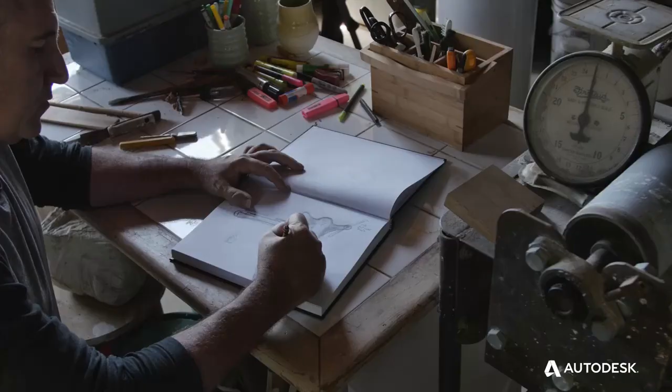As technology advances, the path from design concept to product creation is becoming more blurred. Advanced tools like Fusion 360 allow you to tackle ideation, digital design creation, and validation through simulation, as well as manufacturing, all in one place. Now you have the freedom to explore form and function digitally like never before.

Through this course, we'll explore the aspects of designing and creating a complex search and rescue drone, giving you a deeper look into the planning and design phase of a complex electromechanical device.

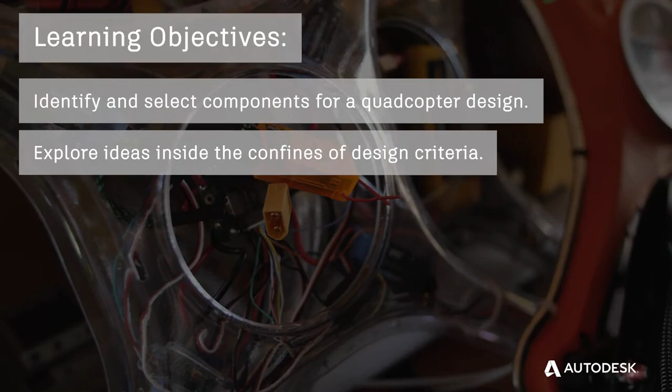After completing a series of lectures and exercises using Autodesk Fusion 360 software, you'll be able to identify and select components for a quadcopter design, explore ideas inside the confines of design criteria, create a complex design with advanced CAD tools, conceptualize a product, explore generative type shapes, and produce realistic rendered images and video. There's a lot to do, so let's get started.

In this course, we'll use Fusion 360, a cloud-based 3D CAD/CAM tool for product development that combines industrial, mechanical design, collaboration, and machining. Fusion 360 is available for both PC and Mac users, and it enables fast and easy exploration of design ideas with an integrated concept-to-manufacturing platform. Best of all, it's free for educators, students, and institutions.

To access and download the software, go to autodesk.com/fusion. Once there, select Student from the pull-down menu. From there, you'll be asked to create an Autodesk account or sign into an existing Autodesk account. Once you're logged in and registered, you can download and install Fusion 360 like any other software.

Fusion 360 User Interface. After completing this lesson, you'll be able to identify legacy, preview and updated user interface elements, and use the new Fusion 360 user interface. If you've been a Fusion user for a while, you may have noticed the changes in the user interface, from the legacy UI to the preview and now to the most current release. In this video, we're going to take a look at all of those and see how it changes the workflow.

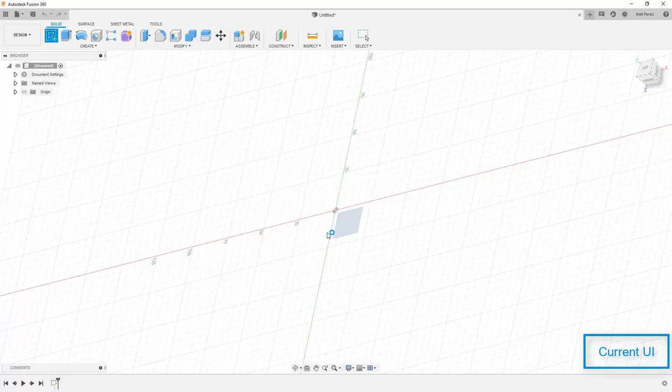You still create sketches the same, you still have the same access to your tools, but your sketch tools, for example, are going to be contextual. Your sketch palette looks a little bit different because all of the constraints have now been moved up to a toolbar, where before they were located in the sketch palette. So this shouldn't affect the actual modeling process, but only change the way you access your tools.

For example, if you're used to starting a sketch by activating a sketch tool first, you can still do that with shortcut keys or the marking menu. So notice that we still have our sketch tools. They're located under a Create drop-down, and we have a sketch location on the ribbon that's located inside of our design workspace. So again, same tools, just slightly different access.

Next, let's talk about some of the other workspaces. The Render workspace has received an update, but again, this is mostly in terms of the icons. Let's take a look now at the Animation workspace. And again, the functionality is the same, however the icons have slightly changed. And again, this is to keep them common across the board.

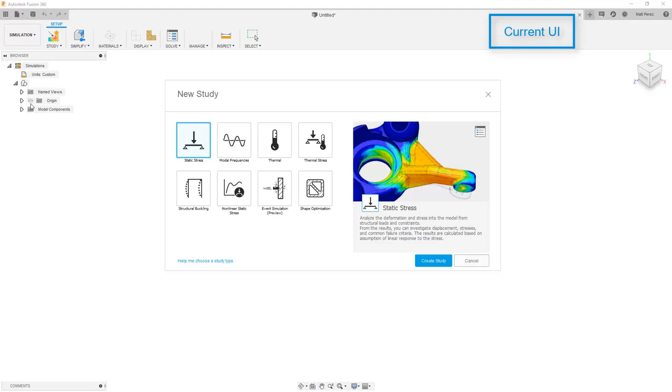Now, let's take a look at the Simulation workspace. This should look very familiar when starting a new simulation. You pick your study, and then you have access to your tools. In the legacy UI, again, all the tools are the same, however the icons have changed. So this again should not affect the way that you access things, with the exception of viewing the results.

In some versions of the user interface, we might have seen a tab on the ribbon that allowed us to access the results. However, in the new UI, we now have a results button that brings up all results tools, and when we're done looking at the results, we simply finish. Now let's take a look at the Manufacture workspace.

If you've been around Fusion long enough, this used to be called the CAM workspace. There have been some big updates that happened in this manufacture workspace over the past year. And also, the user interface does look different depending on if you're using manufacturing extensions or if you're simply using the manufacture workspace. It's always a good idea to check the preview functionality as well as the extensions that are available to see if any of these are needed for your workflow.

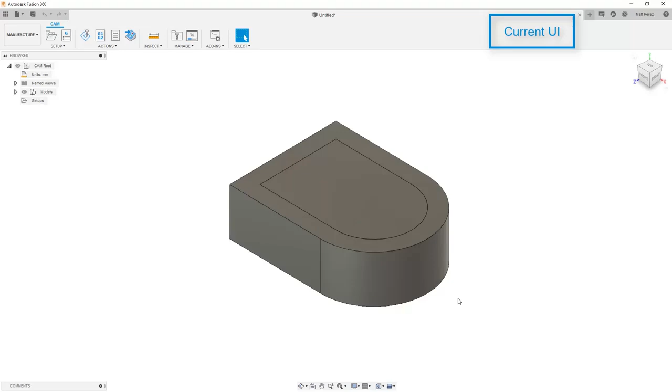Next, let's take a look at drawings. I'm not going to compare the new UI to the legacy UI in terms of drawings. Again, the functionality has stayed the same. However, the icons have been updated. You'll see here we still have access to the same drawing views and the annotation notes as we did before in the legacy UI.

Back in the modeling environment, I want to talk about one more thing that has changed, and that's changed between the preview user interface to the new user interface. We no longer have a light bulb icon in our browser next to things that we want to change the visibility of. We now have an eye icon, and when we select the eye icon, it'll be grayed out with a slash through it telling us that these objects are hidden. However, when we activate it, the slash will disappear and the transparency or opacity of this will also change.

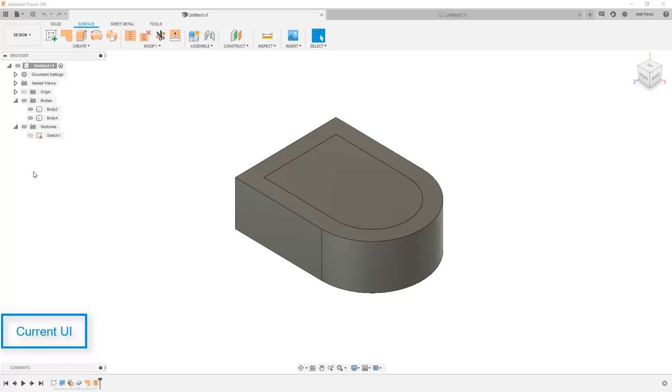So hopefully that's been helpful in allowing you to see the legacy user interface as well as the preview and the most current release user interface.

In this lecture, we cover all aspects of drone UAV design, from planning, component selection, fabrication, and flying. Unmanned aerial vehicles or UAVs can be piloted by somebody on the ground or pre-programmed to follow a route or perform a specific task. A UAV can come in all shapes and sizes. In this lecture, we specifically focus on multi-rotors.

Multi-rotors are categorized by the number of propellers. The drone design focused on in the course is a quadcopter, or UAV with 4 propellers. A UAV can have any number and orientation. We focus on quad, hex, and octocopters and their applications.

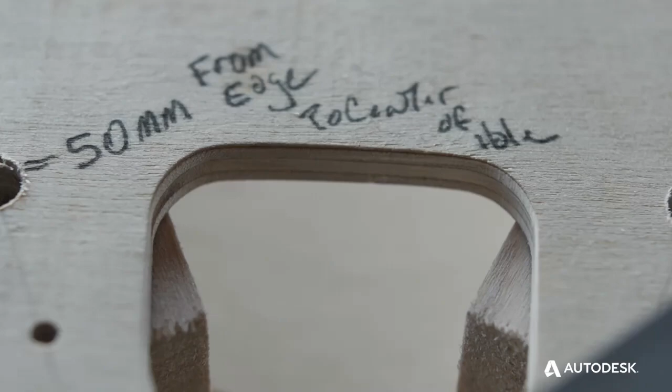Quadcopters range in size from nano, that can be the size of your finger, to units that are several feet across. Their intended application dictates the size to a certain extent. Smaller drones are used for indoor hobby flight, while larger ones have specific functions. Somewhere in the middle, there are a large range of sizes that are used for various reasons, from FPV or first-person view quadcopter racing drones to GPS camera tracking drones and the newly popular backpack drones. Quads are probably the most popular style out there, and you've likely seen or flown one of these already.

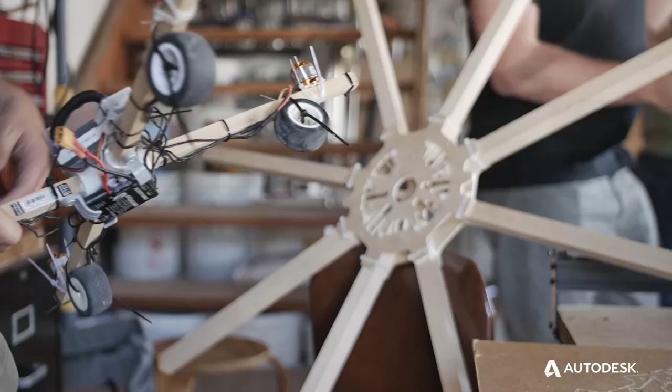Going a step further, with hex and octocopters, you add the ability to carry more weight and have a bit of redundancy in case of a motor failure. If a motor fails on a quadcopter, gravity wins. On a hex or an octocopter, you can still fly and land safely in most cases, protecting whatever precious cargo is being transported. This could be a burrito or life-saving medical supplies.

By far the biggest application, other than just hobby flying, is in aerial photography. This could be a selfie drone or a rescue drone like the one we're creating. Camera drones are being used for 3D mapping, construction, search and rescue, action sports, agriculture, military, security, and even real estate. Basically any reason you would need an eye in the sky. Cameras can be anything from an octocopter carrying a DSLR camera to a quadcopter carrying a thermal imaging camera.

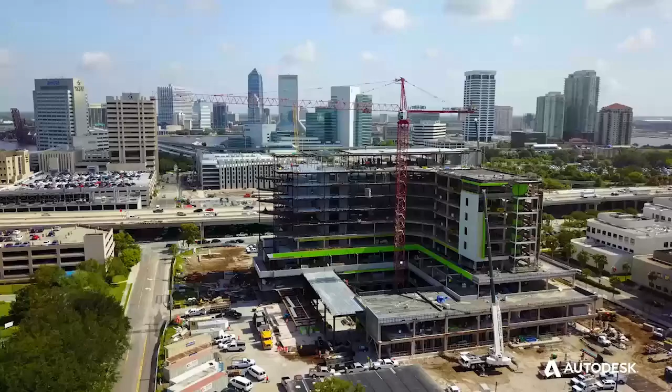Design and construction teams are quickly discovering the value that drone mapping brings to all stages of a construction project, including initial site survey and design, volume and elevation measurements, comparisons, and quality assurance. In a fraction of the time it takes to conduct a ground-based survey, a drone can automatically fly and capture imagery of a project site that can then be processed into highly accurate point clouds compatible with building information modeling or BIM software.

Industrial designer and visual artist Eli D'Elia has taken drone design to the extreme level with Game of Drones. The drone sports company is creating a worldwide platform for beginners and experts alike to compete in drone competitions and sports leagues through groundbreaking drone hardware, software, and the toughest drone airframe. Eli is on the forefront of drone design, developing the next generation of UAVs for aerial combat to industrial and agriculture use, and even search and rescue training operations.

Oftentimes, technology is driven by innovative students at colleges and universities, and design projects or challenges can be a breeding ground for innovation. This innovation environment is exactly where the inspiration for our course came from.

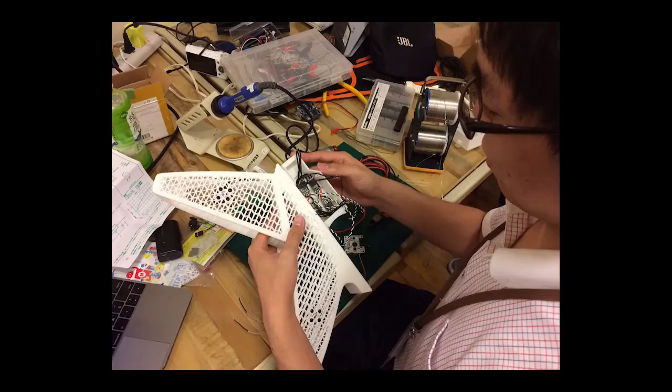Japanese duo Yuki Akasawara and Ryo Komedo, aka Team ROK, and their innovative X-Fane design was born out of tragedy. In the wake of natural disasters in Japan, Yuki set out to create a style of post-disaster search drone. His innovative approach to design inspired us to see where we could take it next.

In addition to Yuki and his design project, universities around the world are paying close attention to drones and utilizing them throughout their curriculum. One such university is Virginia Tech. Virginia Tech has invested in an outdoor drone cage that allows students and faculty to explore the next generation of drones without worrying about the confines of FAA safety regulations. This drone playground is 300 feet by 120 feet and 80 feet tall.

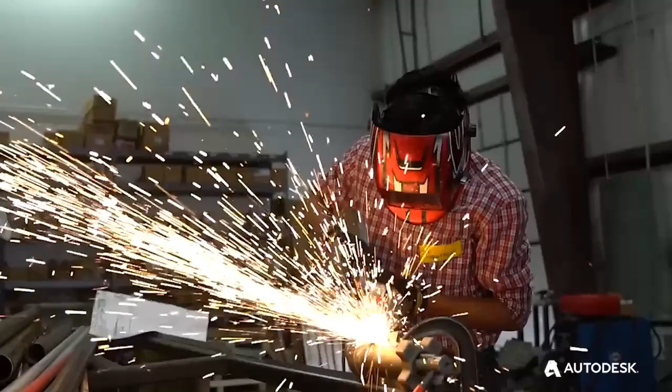This means things like swarms of drones working together can be realized without the risks associated with testing these drones in the open world. There's almost an endless line of stories of innovative students realizing new and unique ways to utilize this technology. And the great news is that it's literally at the fingertips of everyone.

The last thing that we need to mention before we start designing has to do with legality. If you plan on actually building and flying your own drone, it's important to check with your local regulations. Best bet is to check your local regulations and the FAA website.

In this design criteria lesson, we'll be talking about our design specifications. After completing this lesson, you'll be able to understand design requirements, apply critical thinking, and make informed design decisions. A design criteria is an explicit set of goals that a project must achieve in order to be successful. If you're designing a quadcopter like we are, or if you're designing any other product, you're going to have a list of criteria that you need to match.

Now for our case, we're going to be creating a post-disaster search RPA, or remote piloted aircraft. Now this is the most important thing that we need to fit into. We need to have a vehicle that can go up into the air and view areas that are hard for us to get to. The next thing that we need to fit is ease of transport.

That's going to be very important to us when we're creating something that can get into these locations where potentially there's a natural disaster, but it's hard for a human to get into these areas to search for people. So the ease of transport is going to be important because you're not going to want to hike to remote locations or get into these hard to access areas while carrying a large case with you. And lastly, we want to make sure that we have a long flight time. We're going to do everything that we can to optimize our design to increase that flight time.

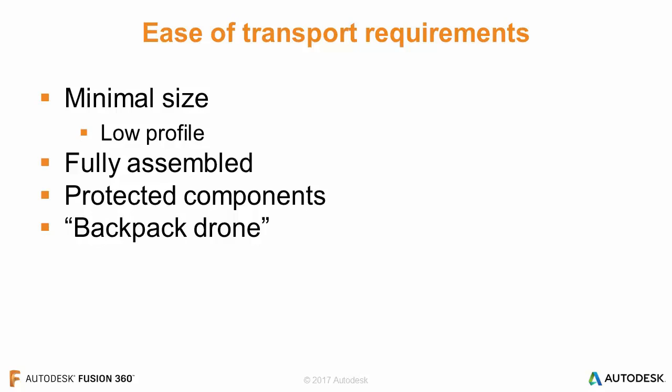And lastly, I have backpack drone. Now this is sort of a category that's popular now because there are plenty of drones on the market that can fold up and fit into a backpack. So we're going to minimize the size, keep it as low as possible, so that we can get it into roughly the size of a backpack.

Next we want to talk about the long flight time requirements. We're going to start out planning for a minimum of 15 minutes of flight time, and we're going to explore various options to see how we can increase that flight time. It's going to be important that not only it's easy to get to our location and it's quick to get up in the air, but that we can stay up in the air and search for as long as possible.

The next thing that we want in terms of our flight time is a good thrust ratio. Now a thrust ratio is the available thrust in relation to the mass of the vehicle. So for example, if we plan everything out so that we have a maximum of 2,000 gram force of thrust on a 1,000 gram vehicle, we have a 2-to-1 thrust ratio. For fast racing drones or acrobatic drones, you're typically going to see an 8-to-1 or a 10-to-1 ratio. Now we're not going to be going that extreme, but we want to make sure that we have at least a 2.5-to-1 thrust ratio, if not better.

The higher that ratio, the quicker it can maneuver, but generally you're going to be drawing more current and you're going to reduce your flight time. So we're going to have to explore our options, and there's going to be some give and take to plan out our maximum flight time while still keeping it agile enough to get to our areas quickly and maneuver into tight spots.

We also want the ability to configure. Now what I mean by configure is be able to change out batteries and not just add new charged batteries, but maybe add a 4-cell battery instead of a 3-cell to increase the voltage. Maybe add longer batteries so that we have a larger amperage capacity. So there are various options that we can explore to configure the batteries and change the flight time.

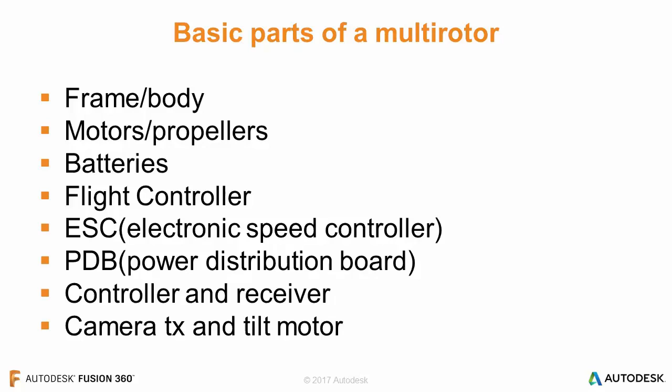So now the last thing I want to talk about in this lesson is the big picture. And understanding the big picture helps us understand what these components do and how it helps us plan them out. So the overall weight of any flying vehicle is extremely important. You can't make a very heavy flying vehicle and have it fly for a long time and be maneuverable, all the different things that we need in our design criteria. So as we look at the overall weight, the batteries that I've planned to talk about in this course are between 100 and 300 grams each. Now we'll get into picking the components later, but right now all you need to know is that we're going to be using 2 batteries, so we're looking at generally 200 to 600 grams total weight on our vehicle.

The components that we're using, which includes the motors, the props, the speed controllers, the power distribution board, the flight controller, the receiver, all the other stuff that's not the batteries, that's going to be between 200 and 300 grams. The reason I gave a range there is because we can mix and match parts, we can change things out and have a big effect on that weight. Now we're going to be shooting for the 300 gram range, but there's a range because you can use different cameras. You can remove the tilt servo and have a fixed camera. We can maybe change out our power distribution board. Different things like this can have an effect. And lastly, we have the body, which is to be determined.

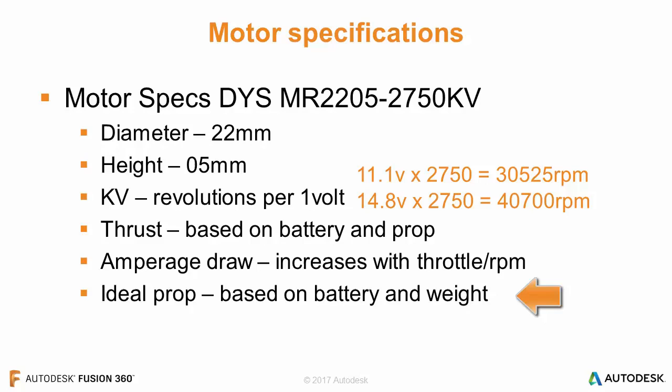And lastly, when we talk about motors, we're going to talk about an ideal prop setup. Now again, it's going to be based on battery, it's going to be based on the weight and the amount of thrust we need, and we'll get into the specifics of those.

So next we want to talk about battery specifications. The batteries that I picked out for this course, I have 3 different battery choices that we're going to look at. They're all Turnigy, they're all LiPo, and we want to explore what these numbers mean. Now the battery that we're talking about here is a Turnigy LiPo 3S 1500 mAh 20 to 30C.

Now the first thing that we want to understand is the LiPo part of it. This is a lithium polymer battery, and this has a very high discharge rate while being fairly light. And these are standard in quadcopters and flying devices, airplanes and helicopters and all these things. It's a common type of battery. Now it's one that we need to be very careful with when you're charging it and discharging it and so on. So it's important that we understand what these numbers mean.

So first let's talk about the 3S number. Now the 3S stands for 3 cells. Each cell is going to be roughly 3.7 volts. So when we talk about a 3S battery, that's an 11.1 volt battery. When we talk about a 4S battery, that's going to give us 14.8.

Now when we were just talking about the motors, remember that 11.1 volts or 14.8 volts will change the max RPM of the motor. Now at 11.1 we were roughly 30,500 RPM, but we went up to about 41,000 RPM when we went to a 4S or a 14.8 volt setup.

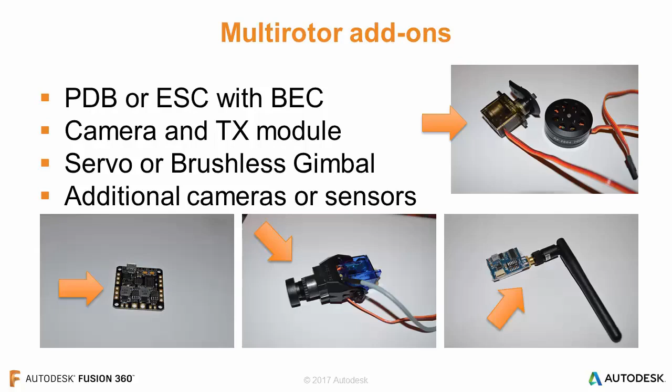In this design criteria lesson, we're going to carry on with part 3 of our component selection. After completing this lesson, you'll be able to apply calculations to select components and make informed design decisions. In this lesson, we're going to be focusing on the amount of thrust provided by our motor and how our battery choices are going to affect both the lift as well as the flight time.

So the DYS motor that we're talking about here is the MR2205-2750 kV. We already know that the 22 is the diameter of the stator, the 05 is the height of the stator, and the 2750 or constant velocity is multiplied by the voltage to give us the max RPM unloaded. But what does all this mean? Well, DYS provides these thrust charts with their motors so we can reference the motor, how our battery choices are going to affect things like the thrust, as well as which propellers that we want to choose.

The first thing that we need to consider is the mass. Now, I've picked out a couple different batteries that we're going to talk about. The smallest 3-cell battery that we're going to talk about gives us roughly a total mass of 800 grams. The largest 4-cell that we're going to talk about gives us a total mass of roughly 1130 grams. So at this stage, we're not too concerned with the amperage or the amount of current that the battery can push out. We're solely going to focus on the 3-cell and 4-cell differences and how they apply to the thrust.

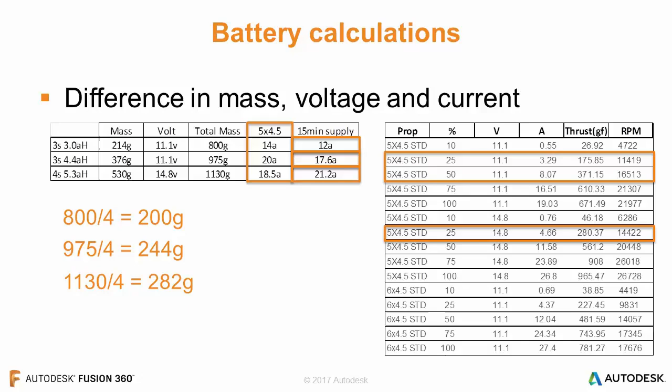Even though the course is laid out so we use all the same components that we're talking about, it's perfectly acceptable for you to take a look at these and figure out better components to use, whether it's a different motor, whether you're planning for a different battery system, or simply sourcing different components so that they're lighter or easier to manufacture or put into our design. I will give out a full parts list, and with this course I've also supplied an Excel spreadsheet that has all of this information on it as well. So you can take a look at that, the components that we're using, and how that correlates to what we're doing here in this course.

For this design criteria lesson, we're going to carry on with part 4 of our component selection. After completing this lesson, you'll be able to compare video components and options and make informed design decisions. First, let's talk about the camera system parts that are spec'd out for this series. For the camera, we're using a Fat Shark 700 TVL CMOS camera. It's capable of NTSC and PAL. For video transmission from the quadcopter down to the ground, we're using a SkyZone TS5823. For the monitor and receiver, we have a 7-inch 1024 by 600 monitor that's made by FieldView.

So first, let's talk about the camera. So the Fat Shark 700 TVL CMOS camera, this is a good system because it has a few things going for it. The CMOS type camera is lightweight, it has low power consumption, and because of the technology is fairly inexpensive. The specific unit has a few extra things going for it. It has removable lenses so we can change the field of view, and it also comes with a pan and tilt servo already built into it. Now in our case, we only need tilt, so I've deconstructed it a bit. I've taken off the pan servo and we've modified it slightly so that the servo is going to be held directly with our 3D print.

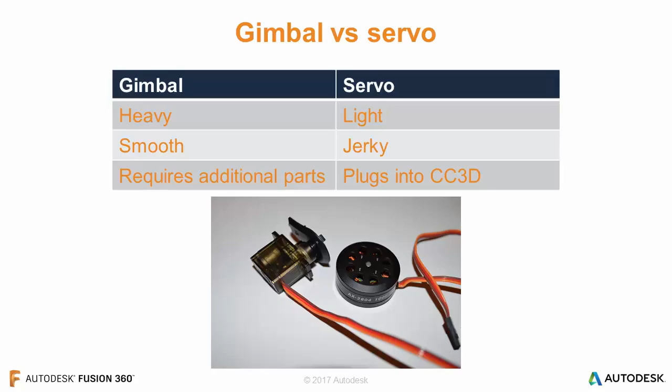In this design criteria lesson, we're going to talk about component location. After completing this lesson, you'll be able to understand multi-rotor mass location and make informed design decisions. First, we need to talk about the mass of each component. Now currently we have 4 motors, each of which is 28 grams.

There will also be some mass associated with the propellers, but this is negligible, and since it's spinning, there's a little bit more advanced dynamics that we need to talk about. But for right now, let's just use 28 grams per motor, and we have 4 of them. The flight controller, which needs to be centered on the quadcopter for the best performance, is 7 grams. Now I chose the Micro CC3D because it's fairly small size and has all the functionality we currently need.

If we tend to upgrade the flight controller, that mass could go up, but it's always going to be centered, so it doesn't really affect the overall performance by shifting mass around. The batteries are going to be a large portion of the mass. We generally want to shoot for between 50 and 66% of the overall mass. Now this includes the body, all the components, and that's where we want the mass of the batteries to fall.

Because we talked about several different ones, from smaller capacity 3 cells to a larger capacity 4 cell battery, we have a range here of about 100 to 265 grams each. We're going to be looking at and planning our overall design for the larger batteries, but we can also use the smaller ones as well. So we're looking at 2 batteries at 265 grams each.

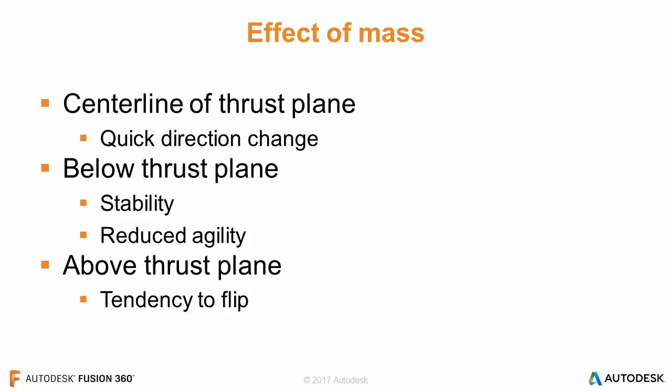Now if you're buying an off-the-shelf chassis, they're fairly configurable. There's lots of slots and holes where you can zip tie or affix different components, so you can play around and move mass around and see how things behave. So let's talk about the mass location with some screenshots of the final design.

So what we have here are the location of the battery, which is roughly centered on the thrust plane. Now you'll notice that the batteries are just a little bit below the thrust plane, and that's because we have components above them. We have the power distribution board, the camera and the transmit module, as well as the ESC servos. We also have the motors.

In this orientation, we have the motors flipped and the propellers below them. Now, in most cases, you'll have the motors pointing up and the propellers above. Now, the reason that we're doing this is for airflow and protection, but we'll talk about that in just a second. So the batteries together are about 530 grams.

So this is by far the heaviest group of components. So having it just slightly below the thrust plane allows us to offset the rest of the mass. Now we could move these up or down, but in this instance we have them kicked up just a little bit so that we have more protection during a crash or when landing.

The motors, in this case, we only see 2 of them. But if we look through it, because we have 2 on each side, we're talking about roughly 56 grams. We have 4 ESCs, or electronic speed controllers. Now in this case, we have 40 grams on each side.

Now if you'll notice, everything is working off of symmetry. We're trying to keep everything as balanced as possible, both left to right, fore and aft, and up and down. Now the ESCs' locations are on the top side of the chassis right now, but they actually can be affixed to the top or the bottom, depending on how we want to move the mass around.

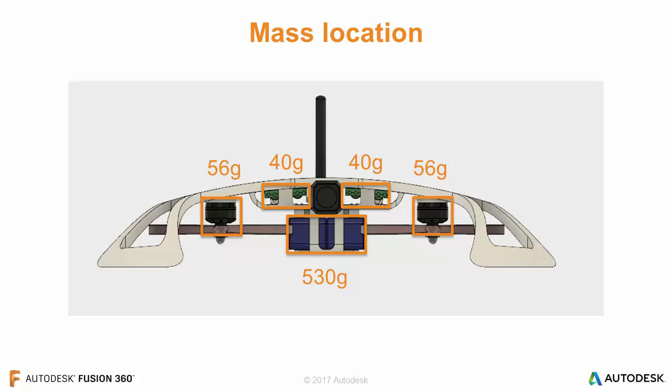So the camera is below the top and it's well above the bottom, so we're not really worried about any collisions or obstructions. And we also have the extensions around the propellers to protect this if we were to bump into a wall or something. Now on the back side, we have the video transmit module. This is also fairly close to the location of the controller receiver. Now the controller receiver is placed a little bit closer to center, but again, these can move around.

Now right in the center, we have the CC3D, which is the flight controller, which is 7 grams. And again, it's best to place that at the center of rotation on the vehicle. So if you draw a cross from each of the motors, right in the center, that's exactly where you want to place the CC3D. It also is directional. It needs to know which direction is forward, and that way it can control the motors.

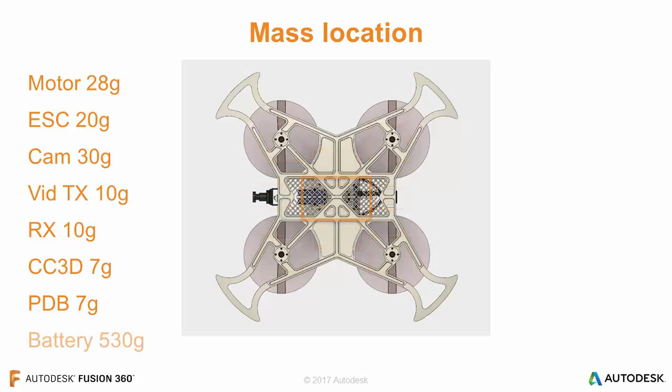Lastly, let's talk about the batteries. Now from this top view we can't see the batteries, but they're located center, and again they're located just below the thrust plane. Because they are the greatest mass, we want to make sure that they're located at the center, both when drawing a cross between all the motors, and that we get them close to the thrust plane so we have a very agile craft.

Now let's talk about airflow restriction, because this is also important. We're able to place the mass wherever we want, but we also have to be careful that we're not obstructing the airflow, because having any obstructions in the airflow will create weird oscillations and also will just affect the performance of the flight. It will reduce the flight time because the motors are having to work harder.

So you can see from this top view, the propellers are mostly unobstructed by the chassis. We made sure that no components were directly in the way. Everything is as close to center as possible. Now we could also make this overall size a bit smaller, but then we would start obstructing the flow of each of the propellers. Now the circles that you see around the propellers are just the path to make sure that we understand the full sweep.

And these are 5-inch by 4.5 pitch props. So this is the final size that we're going to go with, and we have a good idea of how everything was designed to make sure that we're not restricting that.

Another thing to consider just from a pure mechanical standpoint is the direction. So when we're talking about the direction, you'll notice that the motors are all spinning toward the center of the chassis. Now the direction again is important because we have to worry about obstructions. But in addition to the direction they're rotating, the proximity to other objects as well as the proximity to other propellers can greatly affect the performance as well as increase the noise that a quadcopter makes during flight.

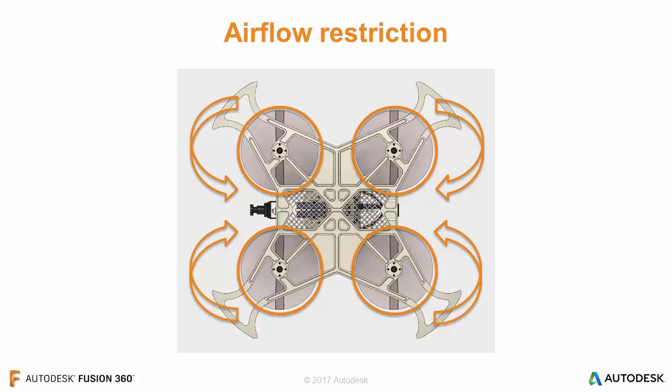These are all things that we need to take into consideration as we're designing our quadcopter. We want to reduce the number of obstructions around the propeller. We want to make sure that the chassis itself or the airframe is rigid. And we also want to make sure that we're not restricting the amount of thrust that we're applying. Now this is one reason for flipping the motors over and reversing them and trying to keep them away from the body as much as possible while allowing as much airflow to go through as possible as well.

In this lesson, we'll focus on creating battery keep-out sketches. After completing this lesson, you'll be able to create a sketch, create a constraint, and create a dimension. Welcome to the part in our course where we start to design our own quadcopter. Now, if you followed along this far, you've been given a lot of different information and you're probably ready to get started. But there's one more thing that we want to take care of first.

You want to make sure that you make a new project folder, and I like to make subfolders. So in this section, we're going to be talking mainly about the role of a designer, making the shape, the geometry, the overall product that we want. So I have a Coursera drone project folder and I have a designer subfolder. That's where I'm going to be placing my files. So now let's go ahead and get started with a new untitled document. So we're starting with a complete blank slate, and this gives us the freedom to do a few things.

The first thing that we have to think about is what our end product is going to be. Obviously we know that this is going to be a quadcopter or a camera drone, but ultimately when you're starting a new project you have to think about a few things. In Fusion you have a lot of flexibility. Now sometimes you want to create stuff that's just made out of bodies. There are no moving parts or multiple components, so you can just get started modeling.

In our case, we're actually going to be creating a quadcopter body. We're going to add a bunch of components like the motors, the batteries, and all the other components that are needed. So before I get started with my first sketch, I want to create a new component. So from my Assemble tab, I'm going to click this icon with the plus on it to create a new empty component.

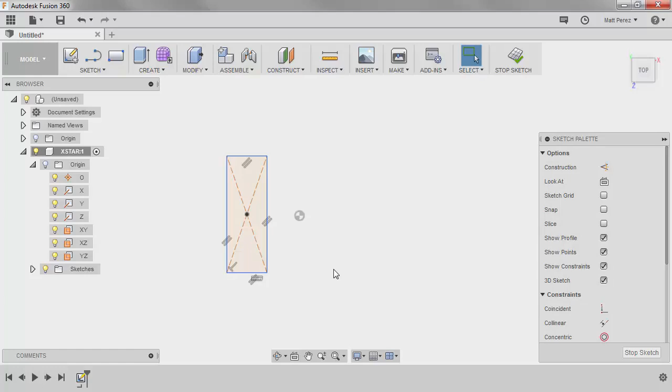Now you might be wondering why I did this, why I chose to just sketch it off to the left. Well, I'm going to take this right line and select it, Control select the origin, and then I want to place a midpoint constraint. So that's going to make sure that this line here is directly centered on my origin.

Now this is important because if you'll remember from our design criteria, we're going to be using 2 batteries no matter which size we choose, and we want to make sure that the mass of those batteries, which is 50 to 65% of the overall mass, is centered on the quadcopter. So by making sure that this line right here has a midpoint relation with the origin, we know that we can start basing our design off of that origin and make sure that everything is symmetric about it.

The next thing that we want to do is we want to place some dimensions. Now I'm going to hit D on the keyboard to place my dimensions, but again you can access that tool however you like. The first battery that we're going to be dealing with is going to be that 1500 milliamp 3S. So I'm going to place this width dimension of 33.5, and I'm going to place a height dimension of 75.

Now this is the smallest battery that we dealt with. So this one's going to give us a pretty good thrust ratio, but we're going to have about a 10-minute flight time with it. The other battery that we wanted to deal with, or some of the other batteries, went all the way up into the larger 4S range.

Now, during the calculations that we did, figuring out what a jump in batteries would do for us, we realized that the larger capacity 4S battery would give us better thrust while drawing less current and allowing us to get a longer flight time. So while this battery is great, and this is where we're starting at, not only because it's a very inexpensive battery, but also because it's smaller and easier to deal with, we also want to make sure that we plan for a larger battery.

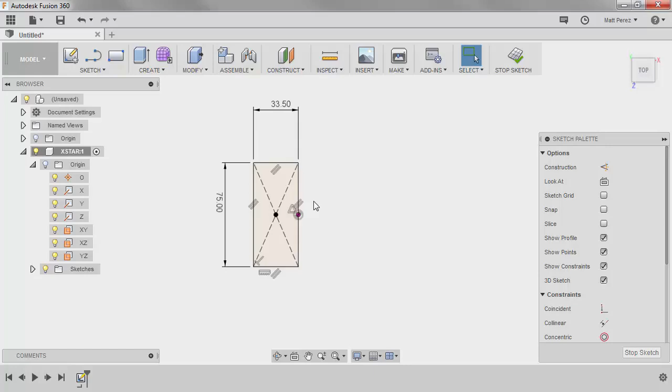So to get started, I'm going to draw an intermediate option, a 4-cell battery that has 2200 milliamp hours. It's a little bit smaller than the one that we talked about in the course, but it's small enough that we don't have to change the overall size of the design because it fits within the criteria that I'm looking for. Now you might be wondering how I know that. Well, I know that because I've already played with all the numbers and I understand the differences. This is a great exercise for you to do, to draw all the various batteries that you want to play with and figure out how they fit.

So I'm going to draw this one on the right side. Again, I'm going to make sure that I have a midpoint relation. So I'm going to select my line, Control select the origin, and place that midpoint relation. Then D on the keyboard. And for the 4-cell 2200 milliamp hour battery, it's actually 34 by 34 square, and its length is 105 millimeters. So you can see it's not that much bigger than the 3-cell that we're dealing with. It's a little bit longer to account for that extra cell inside of it. But in terms of the width, it's only 0.5 millimeter wider.

Now the great thing here too is that the extra thickness in this one actually comes from the height of the battery. It's 34 by 34, where the 1500 milliamp is actually not a square shape. It's 33.5, and then it's a little bit thinner in the other direction. But we're accounting for all these numbers, and this 4-cell 2200 milliamp hour battery is going to give us the thrust that we need. It's going to have a fairly good thrust ratio. It's not as heavy as the 2650 milliamp hour battery. And more importantly, it's going to fit within roughly the same size, so we don't have to make the overall device bigger.

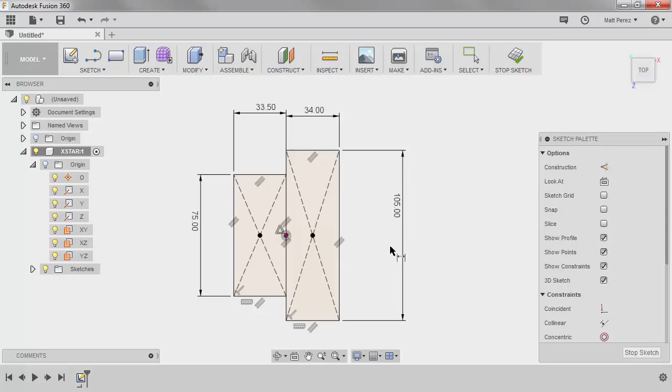So this is the main portion of our Keep Out sketch. So we're going to stop this. We're going to expand the Sketches folder, click on it twice, and we're going to call this Keep Out.

So now we have our Keep Out sketch. It's a good time to go ahead and save the file so we don't lose anything. And notice that my location is the Coursera drone project and inside of the subfolder Designer. So again, you can call this design whatever you want, and it's probably a good idea to spend a little time thinking about it. I'm going to call mine the X Star.

And I'm also going to make sure that I save it, make sure that it's in that location. So I'll expand my data panel, make sure that it's there. And now we're good to go and move on to adding some more sketches. In this lesson, we'll talk about how to start a complex part. After completing this lesson, you'll be able to create construction geometry.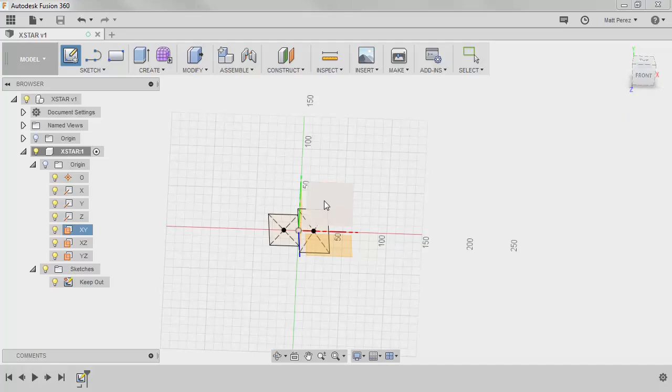So now that we have the battery Keep Out sketch, I'm going to rotate a little bit, and I want to create a sketch on the front plane. So again, I like to start my sketches by selecting the new sketch, and it gives me a good idea of the plane I'm dealing with. If you're ever curious about the plane, when you hover over it, you notice that it highlights it in the browser. So we're dealing with plane XY. And if you look at the view cube, you can see that we're also dealing with the front plane when we select XY. So that can sometimes help.

So for this front sketch, what I want to do is I want to create the shape of the new drone from the front. Now this is not the full solid shape because obviously it's going to be a very complicated part, but I'm going to create a reference surface that's going to give me the top shape. Now we're keeping this fairly simplified because we want to make sure that we explore a lot of creative geometry. We want to make sure that we learn a lot of the advanced tools as well as how to apply some of the basic tools.

So you don't necessarily have to 100% follow along with what I'm doing, but it's a good idea, especially if you're new to Fusion and you're new to designing, that you follow pretty closely along with what I'm doing so that you don't get too far away from the original core aspects that we're trying to learn.

So the first thing that I want to do is start a line. And again, you have many options for how you can get these tools. You can use the marking menu, you can go to the sketch option, and once you're on the sketch option here, you can go directly to the line tool, which is at the 6 o'clock position. So if you want to do this fast, you just hold down the right mouse button and drag straight down, and you're on the line tool.

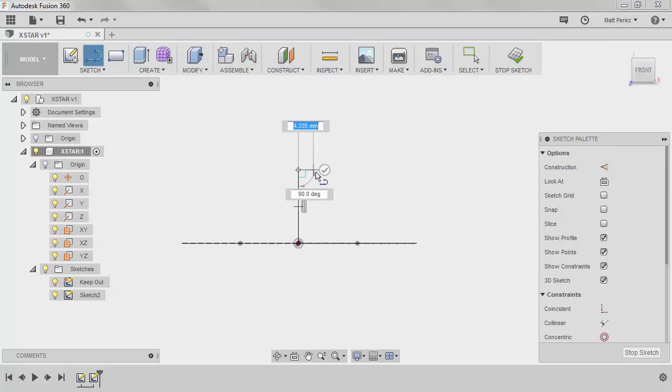You can also hit L on the keyboard to hit the line tool, or you can use it directly from the top toolbar. All right, so again, I like to access these with quick keys or various ways, so I'm going to use the marking menu to access my line tool, start at the origin, and I'm going to draw a line vertically. I'm going to click, and then I'm going to hit the green check mark. I want to hit escape to get off of that line tool, and I want to take a look at something. It automatically applied a vertical constraint for me, but the line is still free to float around.

There are two things that I need to do with this. First, I need to select the line by left clicking, and then I'm going to make this a construction line. It's only there for reference. The next thing I want to do is press D on the keyboard, and I want to dimension this line. And this one's going to be 76.2 millimeters, and I'm going to zoom out. Go ahead and draw one more line.

This one is going to be from the point at the top to the left, but I want to make a note here. So we made this a construction line after the fact. If you know that you're going to be sketching construction lines, you can turn the construction option on, and then everything you sketch will automatically be a construction line. Just remember to turn it back off when you want to create normal geometry.

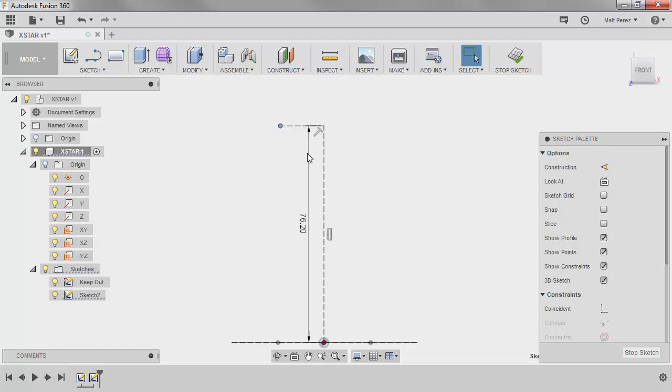This line does not need a dimension. It's only here for a tangency reference. But notice that it automatically applied a perpendicular constraint. So now we have perpendicular constraint, the points are coincident, and I have a vertical reference here. You might be wondering where 76.2 millimeters came from.

Well, if you remember from our design criteria, we wanted to keep the entire device as low profile as possible. Most of the camera drones on the market are relatively tall for additional flight stability, but we're looking for making an extremely agile craft, and we wanted to keep it as low as possible. So 76.2 millimeters is 3 inches, and 3 inches is sort of a criteria that I gave that I want to try to fit into.

Now, of course, we could make it taller or smaller as needed, but 3 inches will give us a pretty good margin of error in terms of keeping enough air above and below the props, so that way we don't have any restrictions or prop wash or any weird oscillations when we're trying to take off. So that's the starting point, and that's where that 76.2 came from.

Again, when you start these designs, sometimes you have to give yourself artificial criteria and see how things fit. And if we find out that 76.2 is too much or not enough, we can always come back to this sketch and adjust it, and everything else will be based off of that number. So as we look at this, 76.2, this is our starting point for the center line of our front shape.

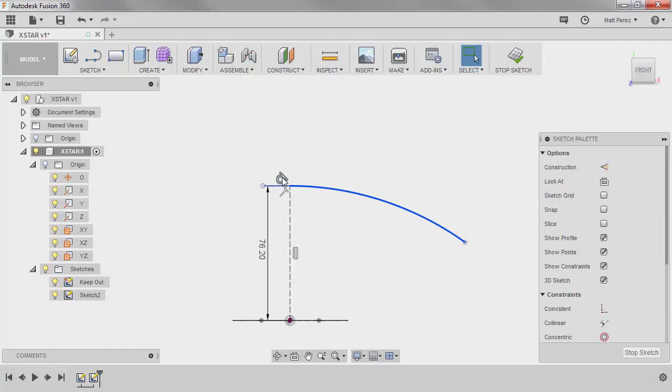So we're going to create an arc by going up to Sketch, and we're going to create a tangent arc. Now the reason we're going to create a tangent arc is because we're going to carry tangency from this horizontal line, and we're going to carry it out to the right. Now if you like to design out to the left, that's perfectly fine. I prefer to design out to the right. So I'm going to be starting from here and simply drag that out and then hit escape. Tangency is automatically applied because of the type of arc that we used.

And now there are two more dimensions that we need to apply to this. So D on the keyboard, we're going to go from this endpoint, from the origin, or from this vertical line. Either one is going to be fine. And we want to place a horizontal dimension of 200 millimeters. Then we want to give this a radius value of 500 millimeters. Now again, you might be wondering where these numbers actually came from. The 200 millimeters is because I want to fit within a certain constrained overall size.

Now remember, we're dealing with half of the shape here. So from the front, we have 200 millimeters wide, and it's going to be wider than our overall design. And the radius value is just approximately what looks okay. We want a little bit of curve because we're dealing with a 3D printed plastic part. If we print it flat, it's not going to be very strong. That little bit of curvature is going to give us some extra strength, some extra structure.

So the 500 doesn't really matter here. It could be more, it could be less. It really just gives us a little bit of rigidity to the overall design. Now if you make that number larger, you could push the motor up higher and not have to worry as much about prop clearance. If you make the number smaller, you're going to have more curvature there, and then you're actually going to restrict where the propellers can go because you're going to start to run into issues where the propeller might hit the design.

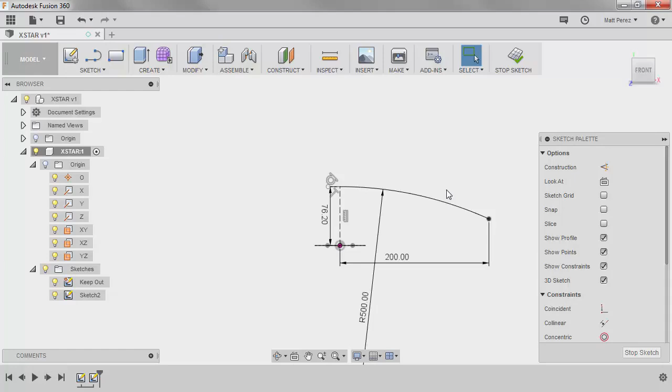So again, somewhat arbitrary numbers, just making sure that they're visually okay and making sure that that 200 is bigger than what we want to design, because ultimately we're going to trim this back. So let's go ahead and stop the sketch. And again, I want to rename this sketch, and I'm going to call this front profile. Let's go ahead and save our design. And if you want to add a version description, this will be visible on Fusion Team. But for right now, I'm going to leave user saved and just say OK, so we can start to add some more sketches.

In this lesson, we'll talk about creating a top-down view sketch. After completing this lesson, you'll be able to create construction geometry. Let's carry on with our design by starting a new sketch on the top plane. So far we have our front shape, and we also have keepouts for our batteries. So let's go ahead and start a new sketch, make sure that we're on the top plane, and let's start to talk about the overall shape of our design.

Now this is where we're really going into more of our mass location and our overall size. So we need to consider a few things here. First thing we need to consider is symmetry. All right, so we need to make sure that the location of our motors, all four, are symmetric about the origin. Now that's not necessarily the case in all designs, but for us it's going to be important to keep all the motors in the right location. We're going to know exactly where our flight controller needs to be to keep it centered, to make sure that we have the most stable flight possible.

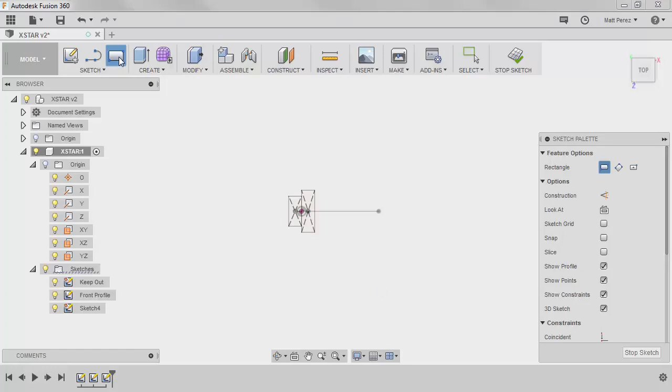So we're going to start with a rectangle. I'm going to make sure it's a center point rectangle from the origin, and I want to draw this out. I'm not going to give it any dimensions just yet. I'm just going to place it, and I'm going to turn each of these lines into construction. Now the reason I'm doing this is because this is going to be a square, and this square is going to dictate the location of all four motors.

So we're going to come in here and we're going to take this vertical line, control select a horizontal line, and we're going to make them equal. Now this is going to mean that we have a square. Now we simply have to dimension it. Now I've played around with this quite a bit, so I have a few numbers that I want to deal with. So I'm going to be using 265 millimeters from corner to corner.

Now when you talk about quadcopters, if you're completely new to this topic, you'll see a lot of people talk about a 250 series quad or a micro quad or different sized quads. Well, the 250 is generally the size between the motors. So when we're talking about the size of the quad that we're building, we're looking at about a 250 size quad, a little bit bigger because we want to incorporate two batteries, where most of these 250 size race quads are going to just have a single battery.

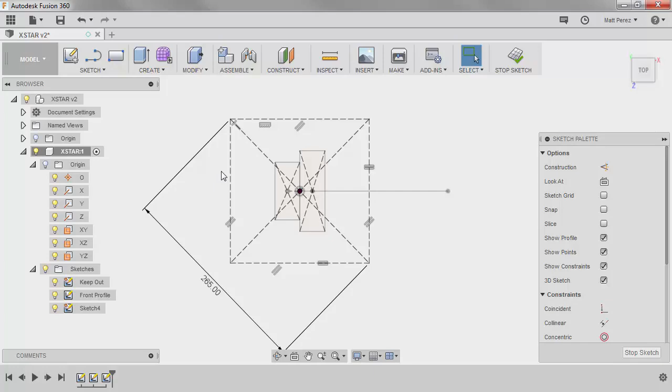So we're sort of bumping those dimensions out a little bit, but overall we're going to try to stick with 265 as the smallest number that we can hit. If we have to go bigger, then we can, but this is going to be our starting point. So now we've turned this into a complete construction square. We have a fully defined square because we have an equal relation between a vertical line and a horizontal line, and we have a dimension from corner to corner.

Now I want to start to place a bit more information here so we can start to really visualize the overall shape. So the first thing that I want to do is I want to draw a circle in this bottom corner. And again, you can access these tools however you want. I'm going to use my quick keys on the keyboard, the letter C, and I'm going to place a circle here that is 28 millimeter diameter.

Now this is going to be the outside diameter of my motor. Now if you remember when we talked about our design criteria and the motor numbers, we're dealing with a 2205 motor, which is 22 millimeter diameter on the stator and 5 millimeters tall on the stator. Now the overall size of the motor itself is 28 millimeters on the outside. So this gives me a good flat circle area that I can mount the motor, knowing that it's exactly the size of my motor, and I'm not going to be obstructing the props at all.

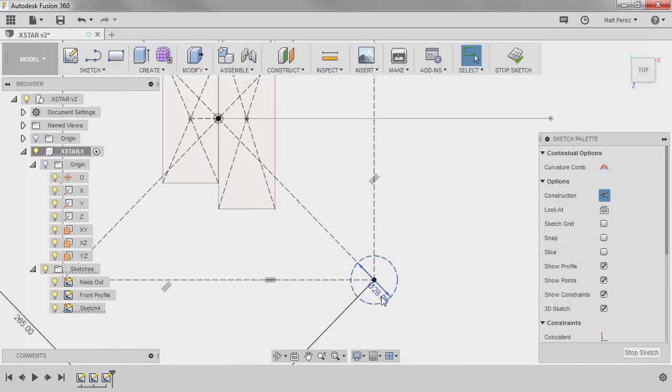Because I don't really need this circle, I'm going to turn it into construction as well. Now I don't necessarily have to put this on all four corners, but visually if it helps you, you can certainly add another one to any of the corners, especially since we're dealing with two different size batteries. That could potentially help. Now because I know that the width of these two batteries is essentially the same and this one's taller, I know if it's going to clear on this side, it'll clear on this side just fine.

Next I'm going to place another circle, and this time I'm going to do 127 millimeters. Now this is going to be the outside diameter of the prop that we're dealing with. So we're going to be dealing with a 5 by 4.5 pitch prop. So this is the overall spin or the overall circle that this prop is going to be moving in. Now again, this can be construction. We don't need it to be any geometry that we're going to extrude or anything like that. But this gives me a good reference for the location of my battery and the location of the prop.

Now also keep in mind that we're looking at everything in 2D right now, and that's something that's hard to sort of get around at this stage since we don't have any geometry. So this is assuming that the thrust plane, or the plane that the actual prop is spinning on, is also centered on the mass of the battery. Remember, that was sort of important. That was a topic we talked about in terms of where the center of gravity vertically is going to be.

If we move the weight down below the props, then we're going to have more stable flight, but it's going to be a little bit harder to change directions. If we have it completely centered on the thrust plane, then it's going to be really quick at changing directions. It's going to be really agile in the air. If we put it above, then it's going to be very easy for it to flip and do some of those acrobatic maneuvers, but it's not going to be as stable in flight.

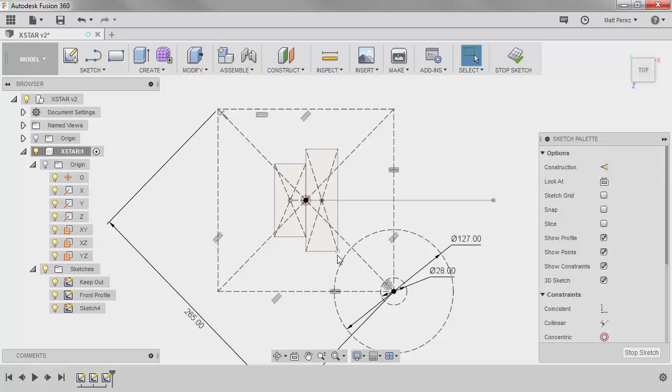One thing that we haven't talked about in the design criteria and that could potentially be important to you is the actual production of the body. Now, assuming that you have access to a 3D printer, the type of printer that you have access to, as well as the size that it can print, is going to be important to you. A lot of printers, for instance a desktop unit like a MakerBot Replicator, which is on the higher end of a desktop unit, are going to have about a 12 by 12 inch print table. So if you're designing for a specific printer, you want to keep that in mind in terms of the size.

Now, we're doing everything as if this body is one piece. Of course, you could make it multiple pieces and bolt it together or whatever the case might be. We're assuming that it's all one piece, and we're going for an SLS nylon print. So one big 3D print for our design. But that might change depending on what you're designing for as well.

So now that we have a single prop and a single motor in the location, I want to start to lay out what the shape of this thing is going to look like. So I need to add a few more lines, and the first couple lines I'm going to add are construction. I'm going to turn on construction, use my marking menu, start the line tool, and come out collinear here. I'm not going to add any dimensions just yet. I'm going to hit OK. I'm going to go from the origin out to the right, again not adding any dimensions, and say OK there. Then I'm going to add a vertical line off to the right for now, say OK, and hit escape.

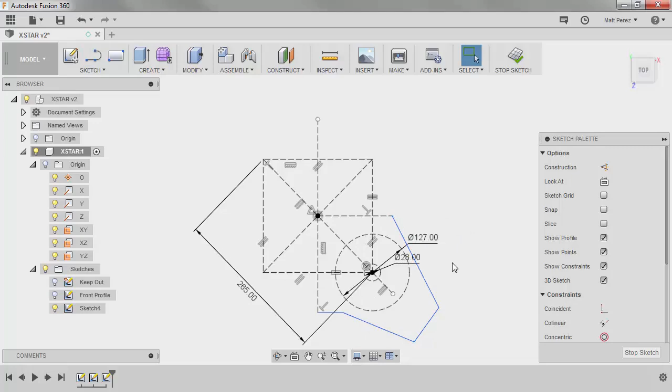I want to take this line out right here, control select this line, and add a midpoint. I then want to make sure that I add a perpendicular constraint. Might have to zoom in between these two. So now I have a perpendicular constraint between this line and this line.

It's midpoint, and this line is collinear with that X, that cross that's going directly through my origin. Now I just need to add a few dimensions. So the first thing that I want to do is press D on the keyboard, and I'm going to add a 50 millimeter dimension here.

Now this might look kind of funny right now, but once we start to add a bit more dimensions, it'll make sense. Again, we're going to place another dimension, and this time instead of placing something here, I'm going to click on this 50 and hit enter. So what this does is it makes that number equal to this 50 millimeters. So that way if I decide to come back and change this 50 to a 75, it's going to update both of them.

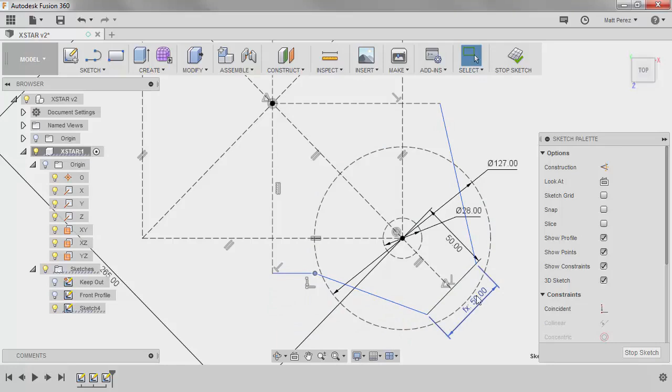Now while that works out great in this instance, it may or may not work out great in other instances. So just keep that in mind, that creating this equation, this reference on the fly, can be very helpful, especially when you're dealing with symmetry and trying to keep everything as symmetric and uniform as possible. I'm going to add a few more dimensions in here. I want 105 degrees on this angle here, and this line I'm going to make 100 millimeters. So the last thing that really needs a dimension is this line right here, and I'm going to make this 30 millimeters.

So again, you might wonder where these numbers came from. Well, as we're looking at this, the prop is 5 inches, and it's spinning all the way out past where we drew. Now this doesn't necessarily mean that our prop is going to extend past our body, but the overall shape that we drew from the front is going to be the overall shape of the top of this quadcopter. That doesn't include anything that goes around the blades to protect them. So this is why I wanted to stop short, so that I can really focus on the design of the area that goes around the prop and protects it.

So I'm stopping there at 50 millimeters within the 5-inch prop circle. The 30 millimeters up here is going to stop short of that 5-inch prop. Now I could make it coincident with here, and it would be pretty close to 30 millimeters. But essentially this is going to give me a vertical line, and I can actually draw that vertical line here if I want to. That's going to allow me to keep an area for my components, things like my camera, my flight controller, and all that, and keep that squared off. And that way I can have solid geometry here if I need it that's not obstructing the flow of the prop.

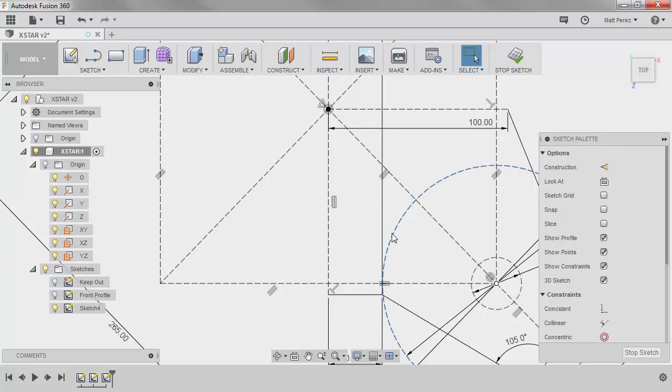All right, so we got a good bit drawn in, but now we need to start to add some mirror and some symmetry. So let's go ahead and stop the sketch for right now, and let's save our design, so that way we can come back to this sketch and make edits without losing any of our work.

In this lesson, we'll go over detailing a top-down view sketch. After completing this lesson, you'll be able to create a sketch mirror and create a sketch offset. Since we've hopped out of the top-down sketch, let's go ahead and rename it. I'm going to call it top-down shape. And again, you don't have to follow exactly along with my naming conventions, or even name the sketches if you really don't want to. This is the design process that helps me.

This is really because once you get a dozen or more sketches, which we're going to have quite a few more than that, it makes it a lot easier to come back to the browser and figure out what each sketch was. Sometimes you might decide to do the keep out sketches first. Sometimes they might be fifth in line. You might have some geometry first and so on. Also when you hover over the sketches in the timeline at the bottom, you can see exactly which component it belongs to and exactly what the name of that is.

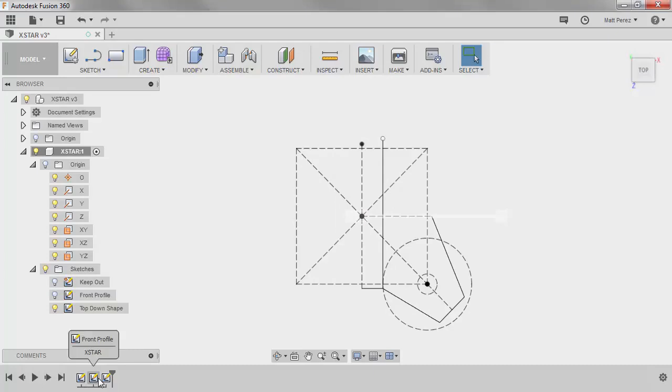So we're going to double click on the top-down shape, edit, and start to add some mirrors. So under the sketch drop-down, we want to go down to mirror, and the objects that we want to select are going to be the solid lines as well as this 30, and we're going to mirror about this horizontal line. If we zoom out a little bit, go ahead and say OK.

So now what we've done is we've created half of the design. Now remember, we're only drawing half of it and we're going to mirror it to the other side. It really helps out with symmetry because you know with 100% certainty that everything on the right side is going to be the same as everything on the left side, at least until there's some unique feature that has to cross over. We're also going to take this vertical line and we're going to change it from construction back to a normal geometry.

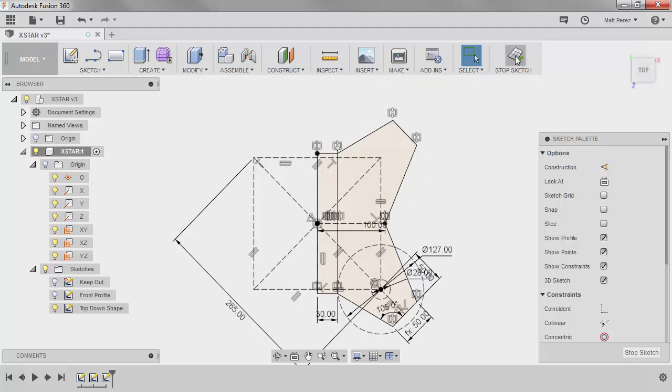So now we have everything on the right hand side that we need to start creating the shape. At this point in time, I'm going to go ahead and stop the sketch, and notice that this line extended past because it wasn't part of that symmetry, it wasn't part of that mirror. Sometimes it's hard to see when you're in the sketch, so sometimes it can be helpful to exit the sketch and then you can come back and drag it into place and have it snap to that geometry. Now when we stop the sketch, it makes a little bit more sense.

There are a lot more elements that we need to add in, but at this point in time, I'm going to break them out into different sketches. Now the reason I like to do that is because when I go back to make edits or changes, sometimes it can get overwhelming to see dozens and dozens of constraints and dimensions and all those things. So it really helps me to come back after the fact in a separate sketch and just project geometry as needed.

So let's start a new sketch, again on the top plane. We're going to select XZ. And now what we want to do is start to create some of the offsets because obviously we're not going to make this just one big solid body. We're trying to keep the structure as minimal as possible to keep it light, but also keep it as strong as possible. And I know that's a little bit tough to do, so we're going to take a look at how we can achieve this.

So with this profile, we have a few things going. We have a complete closed profile here, and we have a complete closed profile here as well. We also have some reference lines for where some structure is going to be. And we potentially have sort of a layout of where we need openings or where we want to minimize the restrictions to let as much airflow through as possible.

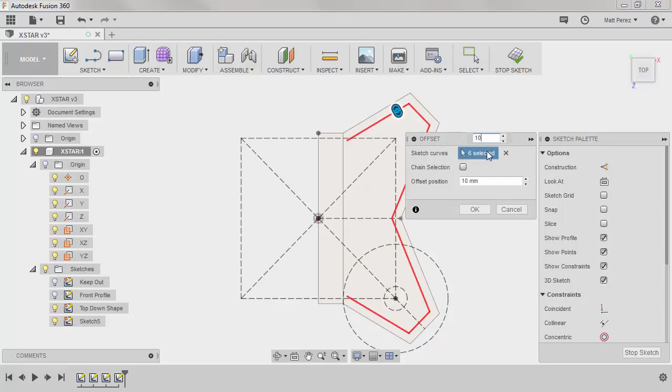So let's start by taking this outside profile and we're going to offset it 10 millimeters. So I'm going to go around and rather than use the whole profile, I'm going to grab what I want and use my marking menu and we're going to offset this 10 millimeters. I'm going to type in 10 and I'm going to say OK.

Now notice that I didn't chain the selection, and if I come back and I turn off the top-down shape, notice that I don't actually see anything here. So I'm in this new sketch, but my offset is actually not in this sketch. If we go back to the top-down shape, notice that the offset is actually in this sketch here. So this is something that we need to be aware of. So I'm going to undo back before that offset, and we're going to look at how we can bring this information into the current sketch.

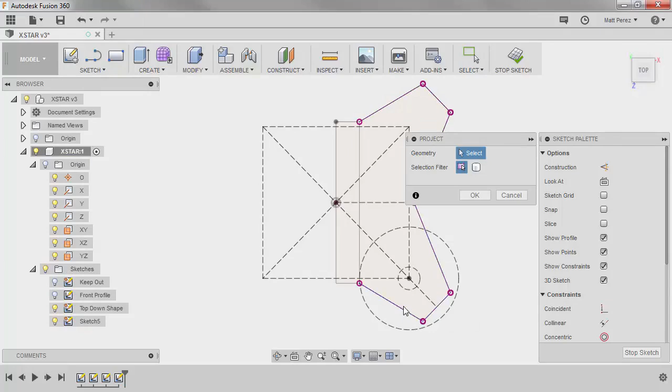So in order to do this, we're currently editing sketch 5. Under our sketch dropdown, we have project include and project, which is the letter P. So this will allow me to bring in information that I want to have in this sketch. I'm going to go ahead and bring the center line in as well, and I want to bring this line in as well and say OK. I'm also going to go ahead and draw circles here as well as here.

I'm going to make both of these equal to each other. And then I want to give them a dimension. Now, I don't want them to be exactly what the prop is. I actually want them to be just a little bit bigger. So I'm going to give it a dimension between these of 2 millimeters. Now the reason I did this is because this line is going to be where a support is going to be located. So I don't want it to be exactly 5. I want it to be a little bit bigger so I have enough room.

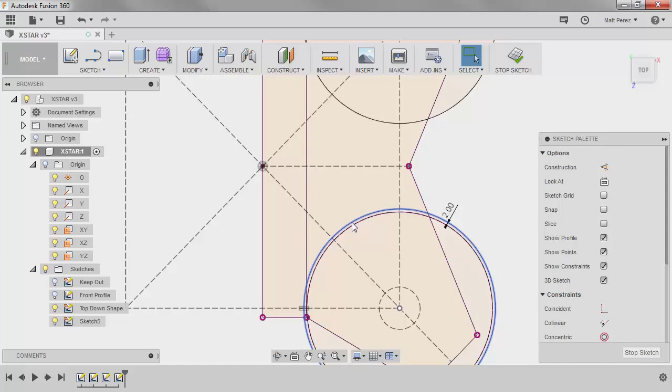And this isn't going to be directly in contact with the propeller, but it's going to be above it. So that way I know that I'm not obstructing the airflow, or at least as minimally as possible, while still giving it structure. So now if we hide the top-down shape, notice that we have the offset, and anything that we projected, for instance, I added a dimension from here to here, it automatically projected that into my sketch.

So now what we're dealing with is a complete copy of some of the shapes in the top-down, with the exception of not looking directly at some of the construction geometry that we had. So this helps clean up a bit what we're looking at and helps make our offsets more realistic.

So again, I'm going to use my marking menu for offset, and if you select chain selection, it'll only carry as long as there's tangency. But what you want to do is select all the entities that you want to offset, and I'm going to bring these in 10 millimeters and say OK. I'm also going to place a circle at the center here. That's 28 millimeters. And I'll do the same thing over here. And I'll make these equal.

Now the reason I didn't project this specific circle is because I don't necessarily want to drive it off the 28 that's in the first sketch. I might want to make it bigger or smaller. This is going to be the mounting circle for our motor, which has a 19 millimeter diameter bolt circle. Now all this information is directly from the DYS manufacturer's website, or you can find it on various websites. Wherever you find the motor for sale, generally that information will be located there.

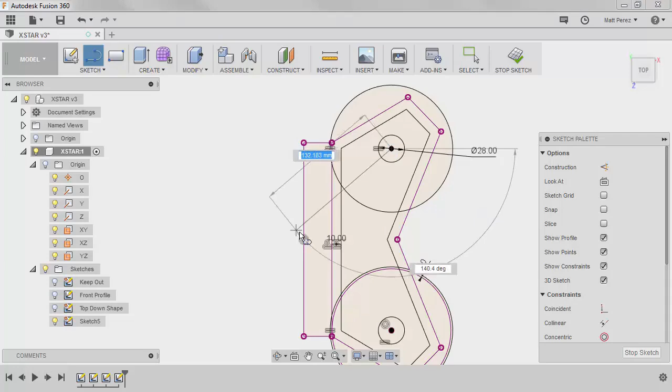Now there are a few more things that we want to add in here. I'm going to start by sketching a line from the center of the motor to the origin and back up to this one. So this is going to be the location of a support. It's going to allow me to add some structure to where the motor is supported. And of course the motor actually needs to be supported by these walls as well. We also want to add a bit more. We're going to go from here down to here. And we're going to eventually add some structure inside of this center as well.

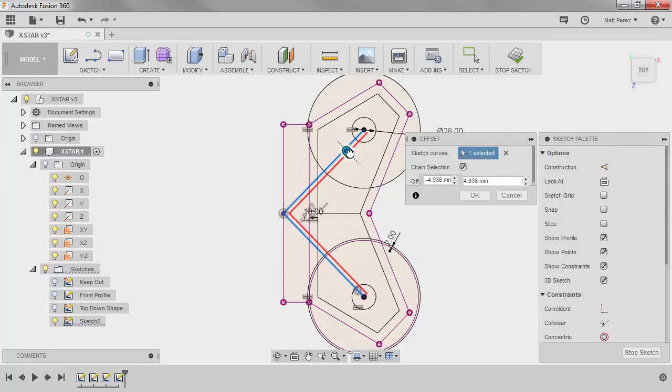So for right now, as we look at this, we've got the motor floating out in space. We've got these 10 millimeter thick walls on the outside. And we need to start adding, again, some additional thickness. So I'm going to take these lines and this line, and I want to offset those as well. So again, using offset, I'm going to grab both of those lines, and I'm going to offset them 5 millimeters. And we're going to go -5. And we're going to repeat it, again, using the marking menu. And this time I'm going to offset them +5.

Now keep in mind this extends out, but I don't need to use this. The selection process inside Fusion, when we go to do things like extrudes, is very simple, so I don't need to worry about trimming this geometry. And oftentimes, if you go to trim geometry, it's going to undo some of those dimensions and constraints. So oftentimes it's better to just leave it in there.

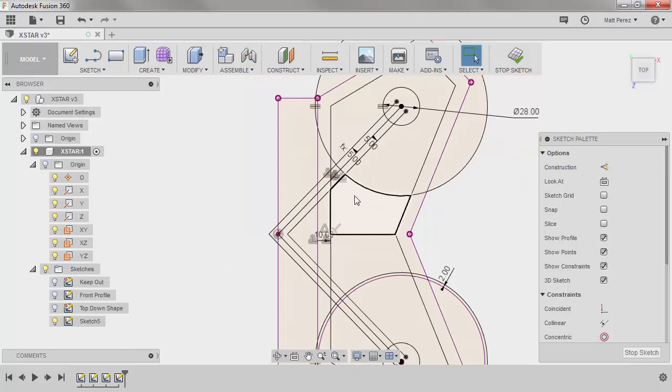Now one thing I also like to do is I'm going to take this number here, and I'm just going to click on this one and say OK. So that way the offset is controlled completely by this one here. So if I change this offset to 6, it'll change the other one as well. So a very easy way for us to make sure that we keep those dimensions in check. We can also do that with this 10 millimeter and just say that this 5 is half of the 10 if you want. So there are various ways that we can do this. Now again, we've got some progress.

As you're learning Fusion, or as you're starting to get into this, it's a good idea if your sketch is going to be very detailed, if you're going to have to add a lot of information, to go ahead and stop the sketch and save the file. So that way you always have a point that you can come back to. Now let's say that you get pretty deep into the sketch and you decide that you don't like it and you want to start to undo it.

Well, if you've exited the sketch and saved it, then you have a version of the file, in this case version 4, that has that sketch. And if you save a later version with the more complicated sketch, you can always go back to that version as well. So it's pretty flexible, and I encourage you to save often, so that way you have various versions that you can reference if needed.

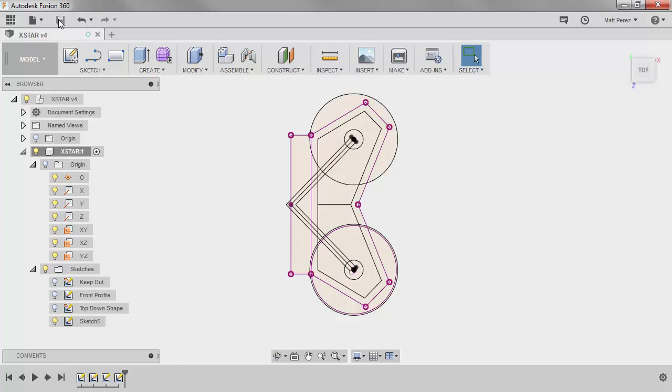In this lesson, we'll complete a top-down view sketch. After completing this lesson, you'll be able to create a sketch mirror, create a link dimension, and create a projection. So let's go ahead and rename the sketch while we're out. I'm going to call this top-down cut, and then I want to go back and edit the sketch.

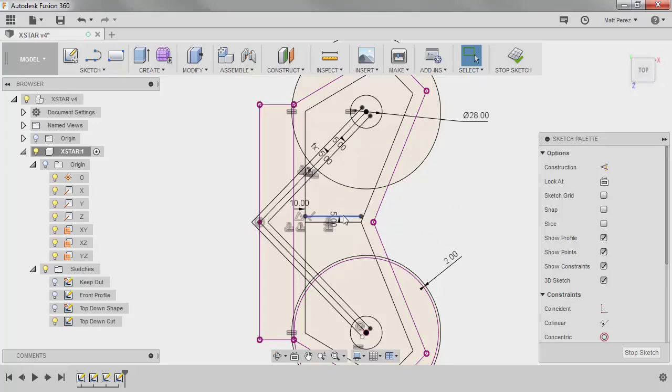So from this sketch, we've got our 10 millimeter outside wall. We still need to add some offset to this line, and we need to add a bit more information in various areas. We need to add some offsets on the inside as well. So let's go ahead and add a bit more detail. So I'm going to do an offset of this line, and we're going to say that this dimension is 5 millimeters. Now you'll notice that while I'm inside of this operation, it doesn't let me click this. So I'm going to go ahead and just say 5, then I'll double click on it.

Sometimes it helps if the constraints are in the way to hide the constraints. And let's go ahead and do another offset. We can say -5, and again we can make it equal. Now one thing you'll notice when we offset a line is because this line ends at a point, what we're actually doing is we're creating a shorter version. Now again, trim or extend, if we use this, it's going to undo that dimension. And you can see that it takes it away. And that's actually okay, but it also undid some additional dimensions.

So the way to get around this is, instead of using that offset, is to simply just draw a horizontal line. Now if the line doesn't happen to be horizontal, you can make it parallel, or you can do some additional constraints to make sure that that works. But in our case, they're perpendicular to this vertical line, so a horizontal would be just fine. I'm going to make this one construction, and any center line that I don't need, I'm going to make those construction as well, and that helps with the selection process down the road.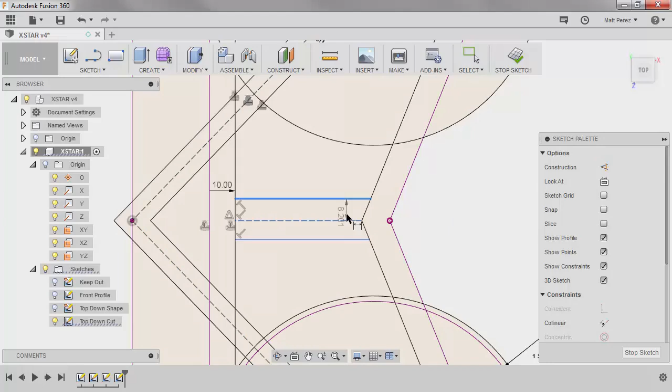Then I want to apply a dimension. So in this case, because I'm in the middle of applying a dimension, I can simply just add it there. And also, if you know the dimension, we can simply type in D19, and it'll be equal to that as well. Under Modify, you can go down into Change Parameters, and you can make universal parameters. They're called user parameters, and you can simply name them ahead of time.

So for instance, if you wanted a specific 5 or 10 millimeter offset, instead of having it called D19, we could name it offset, and notice that it re-references all of these to be equal to offset. You could make that ahead of time, or you could name it on the fly instead of being D19, and you can do it that way as well. So that way you don't have to remember D19.

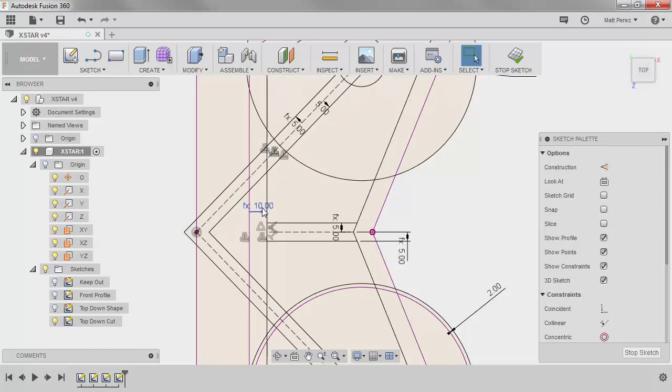All right. So for instance, this 10 right here, we can say that this is offset times 2, and that is equal to 10. So that way, if we ever come back and we change this dimension right here, which is currently 5, if we change it to 6, then this one will equal 12, and so on. So again, it's just a way to make sure that we're keeping those numbers fairly consistent.

All right, so now we've got a bit of structure in the center. We've got the structure around the outside. We've got the structure going to the motors. And again, we don't have to worry specifically about trimming this up. If we trim it, then we will lose some of the offset information because of how the offset tool works. But we can simply leave it long because we can still select these areas.

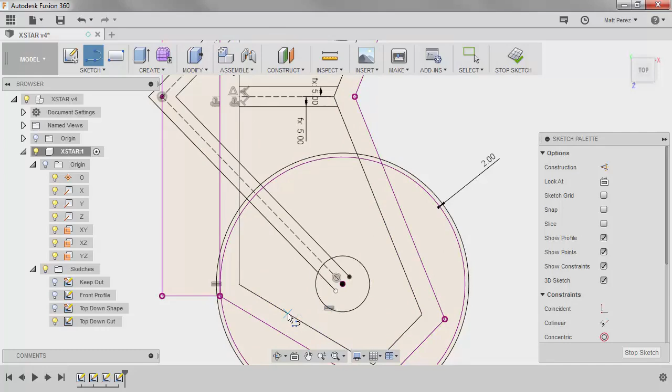So now we want to add a little bit more. So we need to make sure that we have some structure for the motor that comes to these sides here. And the way that we're going to do that is we're going to carry a line from the center that goes completely out. So again, I'm going to start a line. I'm not going to snap to the midpoint. I just want to snap to the line over here. And the way that I'm going to make this work is I'm going to make it coincident, not in a midpoint relation. And then I'm going to make it perpendicular to this line here.

All right. So this is a center line. This is where we're starting our structure. And then we're going to carry a line from this point that's parallel out to the side. So we'll find that intersection point, and it snaps to it automatically. And notice that that's coming out perpendicular automatically, and we can take it out to the wall, and we didn't have to add any additional constraints.

Now it's a little bit different when we get out here because we don't have anything to snap to, but I'm actually going to take it and drag it out, and it's tangent, and all I have to do is make these parallel, and it'll fully define it for me. So if I temporarily hide the constraints, you can see what we've done is we've added some structure here, and we've added the bulk of this structure here because this is a shorter section.

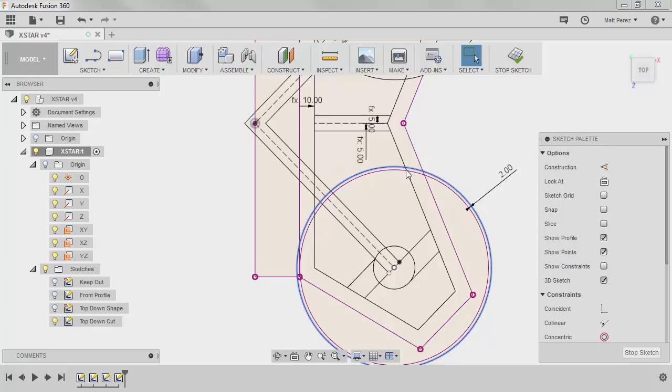All right, so we're going to have a lot of structure at the center of the quadcopter, and this arm here is quite a bit shorter, so we wanted to carry that structure into the motor as quickly as possible, so it carries it around this corner. And then this one here actually helps provide some additional support to this edge right here. We will be adding some additional structure, so this will be a solid panel area, and this will be a small line here that has some structure to it as well. So keep in mind that this is the reasoning for offsetting this in this one way.

Now in general, as we go through our course, we're going to have a section on engineering where we add some more strategic supports. We add some different features to help make sure that this thing is fairly strong. Those types of features will also help us dictate how this thing should work. And again, since I've done this before, I just sort of know that this will work out better and still keep it fairly light. So don't be too worried if you don't understand why some of the design decisions are the way they are. Sometimes it just comes from doing this many times, from experience.

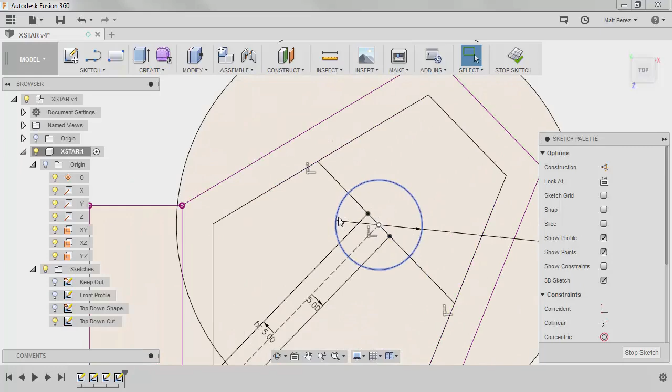We're going to carry on this process on the other side as well. We could mirror this, but sometimes it's just good practice to do it. So if you're new to applying these constraints and dimensions and creating these sketches, it's a good idea to just do it. Just take the repetition as some practice, some experience. So again, find that intersection point. We're going to make these two lines parallel.

And then we're going to do the same thing on the back. We're going to come over here. This is tangent, so we're going to make sure that's parallel, and that fully defines it. So that is going to give us some structure for the motor, and it's going to carry that structure right to the center point, and we still need a little bit more. All right, so we're going to have to add a little bit more structure here.

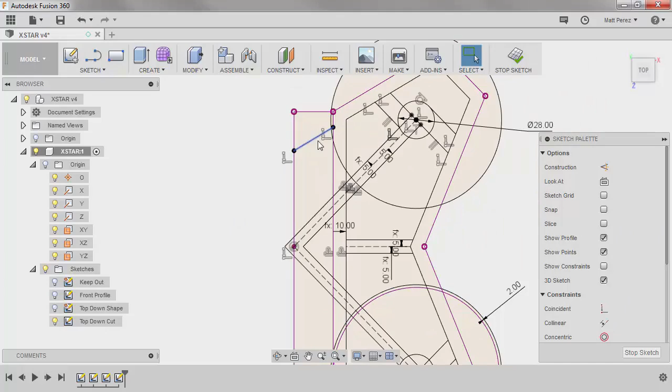We're going to go ahead and offset this line right here. We're going to not offset this line because we're actually going to leave some of this open in the middle, but we want to carry a line out and offset it in the back so we have a little bit more structure. So first I'm going to draw a line from this to here. I'm going to hit escape. I want to select these two and make them collinear. So what collinear is going to do is allow me to essentially follow the path of this line without having them connected.

So this is going to give me some structure on the backside right here. We could also just carry it horizontally, but in this case I actually want to keep it going this direction to help with the shape, that X shape that we're going for. So it'll add a little bit more structure to the back as well. And again, using repetition, we're going to follow the same thing up in the front. We're going to use collinear, which we can pre-select if we want to, and we can make these two collinear, and then just make sure that it's deselected once you start modeling again.

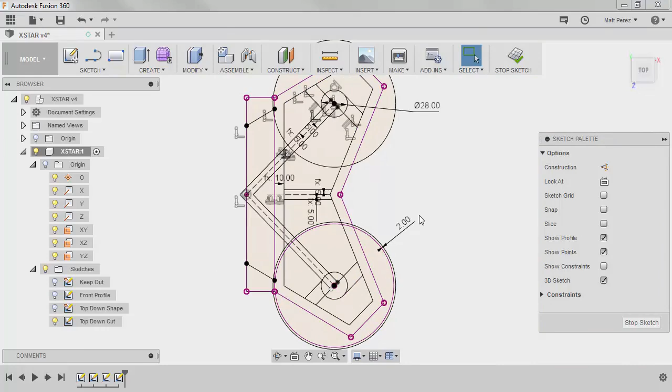All right, so at this point, as we're looking at this design, there are a few areas that are going to be open, and there are a few areas that are going to be closed. So this area right here, and this area right here, and this area right there, I'll go ahead and just select them all.

All these areas are going to be open. Now this is going to allow the most amount of airflow that we can get without obstructing the prop. Now this area right here is going to be closed off, but it's going to have a minimal thickness sheet right there. So while the majority of this body is probably going to be about 8 to 10 millimeters tall, with some areas that are going to be reduced for weight, obviously, this area right here will probably be 1 to 2 millimeters thick, and it's just for some additional structure.

Because of the location of the prop, if we simply just took this brace out and just carried it all the way out here, we would probably have a lot of flex in this area. So we're going to leave some of this up to the engineer and do some simulations and figure out where the weak spots are. But in general, that is the design process for, or at least the thinking behind why these areas are the way they are.

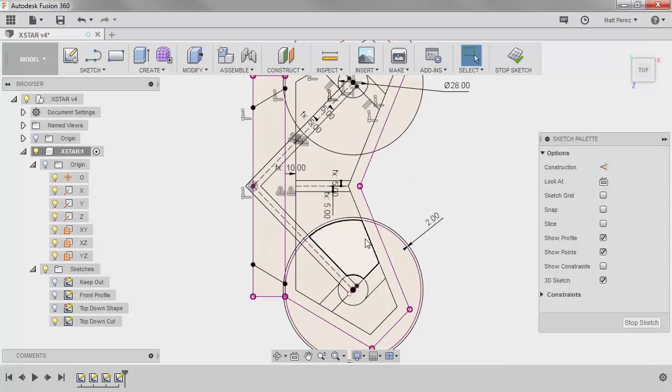Because we have the circle and we want to make sure that the prop itself can pull as much airflow through there so we don't have any obstructions. We're not restricting the amount of airflow. We're not artificially decreasing our flight time because we're having to use more current to try to pull more air, and we're not getting the ideal thrust. And we're carrying the motor back to the center point of the chassis, and we're also carrying it as close as we can to any additional structure.

So at this point, that is going to be the majority of the sketch that we're going to need to start to create some solid geometry. So we're going to go ahead and stop the sketch. We're going to make sure that we save our file. And this is going to give us a great foundation to start creating our solid and surface geometry to start to see how this thing will take shape.

This is a video overview to accompany written instructions for practice exercise 1. In practice exercise 1, we're going to create a new file with a top-down layout sketch. The sketch will be for a 450 series quad and have 7-inch propellers.

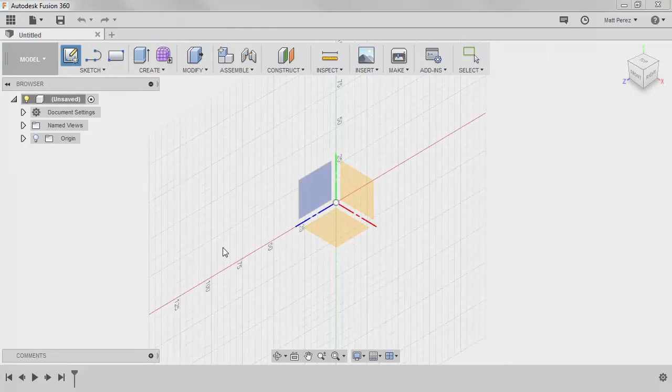This is a video solution for practice exercise 1. To get started, you may want to create a new subfolder in your Coursera drone project file. This way you can keep practice exercises and challenges separate from the normal CAD files. We're going to start with an untitled design and create a new sketch on our top plane. We're going to zoom out a little bit and start by creating a rectangle and a center point orientation.

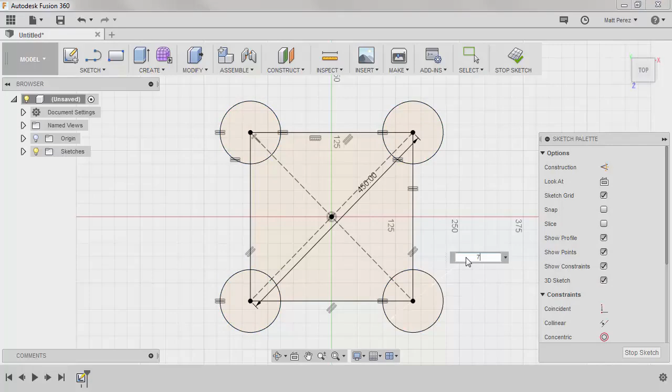Apply an equal constraint between a vertical and a horizontal edge. Apply a dimension to one of the angled construction lines of 450 millimeters. Next, press C on the keyboard to place a circle at each one of the corner points. Press Escape, select the equal constraint, and make all 4 of the circles equal. Press D on the keyboard, place 7 IN for 7-inch, and all 4 of the circles are now 7-inch diameter. We can stop the sketch and save our file.

This is a video overview to accompany written instruction for practice exercise 2. With practice exercise 2, we're going to start an untitled document and create a few user parameters. One for airframe thickness of 8 millimeters and one for offset of 2 millimeters.

This is a video solution for practice exercise 2. We're going to start with an untitled document and select Modify, Change Parameters. We're going to select the green check mark to create a new user parameter called airframe thickness. This value is going to be 8 millimeters. Create another user parameter called offset. This one's going to have a value of 2 millimeters. Select OK and save your file.

This is a video solution for practice exercise 3. In practice exercise 3, we want to first start by uploading the file C03-W1-PE-03. Once uploaded, go ahead and open the file. Expand the Sketches folder, right-click, and edit Sketch 1. Sketch 1 contains a 2 millimeter offset dimension. We want to double-click this, and we're going to set this equal to a parameter called Sketch Offset.

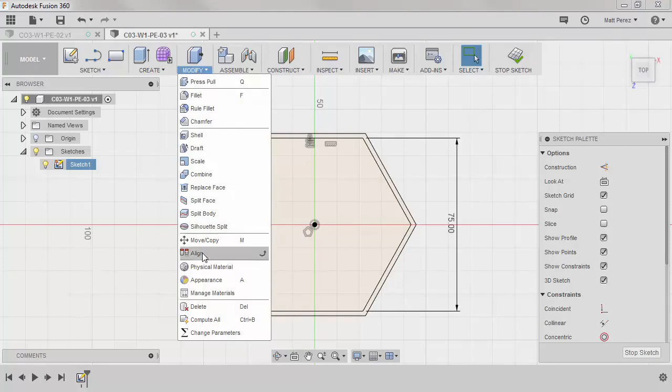Start typing the letter S, and Sketch Offset user parameter will appear below. Select it and hit Enter on the keyboard. It's now linked, denoted by FX, to a user parameter. Next, we want to modify that user parameter. Under the Modify dialog, select Change Parameters, double-click in the expression box, and set this to 4 millimeters. Select OK, and notice that FX is now set to 4 millimeters. Stop the sketch and save your file.